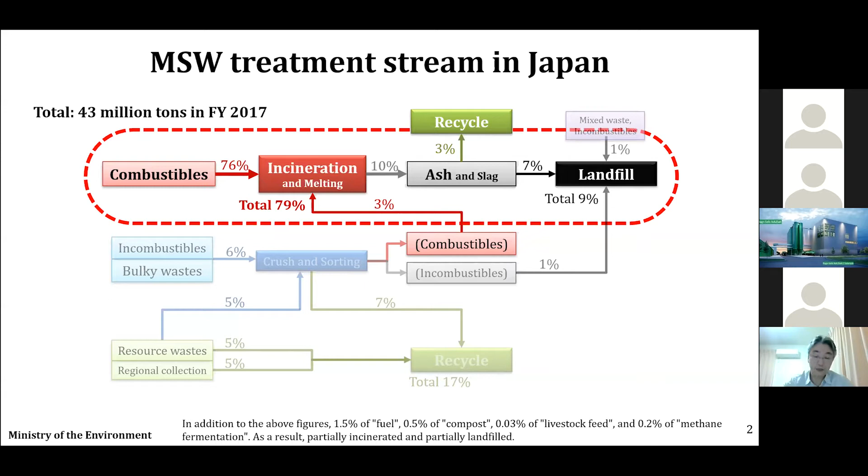However, 7%, including most of the fly ash, still goes to landfill. I consider one of the reasons would be due to the characteristics of fly ash. So let's consider the factors affecting the characteristics of ashes through the generation process.

As is well known, after incineration of MSW, two types of ash are obtained: fly ash and bottom ash. Today the focus is on fly ash. Fly ash is generated because during incineration, small particles float along with the flue gas, and the flue gas contains acidic gas and low-boiling-point heavy metals.

After gas cooling through the boiler and water injection, some excessive lime and activated carbon are injected to neutralize the acidic gas and to adsorb heavy metals such as mercury. Then the mixture of fly ash and air pollution control residues is filtered at the bag filter.

As a result, the characteristics of fly ash become high pH, high concentration of calcium and chlorine, and also high concentration of heavy metals. The gathered fly ash is mostly taken to landfill, but part of it is recycled. In the next slide, I'd like to introduce an overview of fly ash treatment technologies.

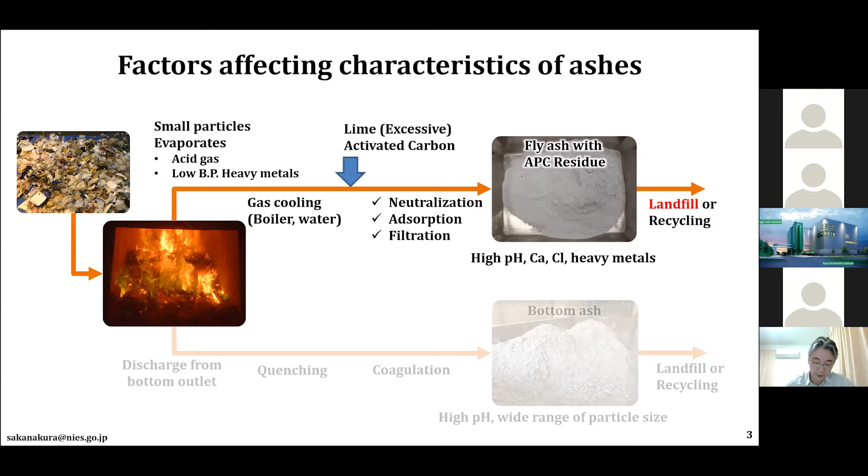The treatment technologies of fly ash can be distinguished into two types: thermal treatment and stabilization-solidification treatment. Thermal treatments are melting, vitrification, sintering, and recycling as raw material of cement. After thermal treatment, most of the residues can be recycled as construction material. Furthermore, byproducts from melting, such as secondary fly ash and metals, can be recycled as raw material for smelting.

However, as I mentioned, currently most fly ash is landfilled after stabilization and solidification treatment. The technologies are chemical stabilization using organic or inorganic chemical agents, and cement solidification. After that, fly ashes go to landfill.

In this slide, I'd like to briefly introduce landfill sites in Japan. The upper left is a very large disposal site built in the sea. Large cities facing the sea, such as Tokyo and Osaka, dispose of waste at such marine landfill sites. Such landfills function in the sea to block water, keeping the water level inside a little lower and preventing dirty water from leaking to the surroundings.

The upper right and lower left are inland landfills, shown before waste is put in. At the bottom, a rain collection pipe can be seen, and double liners are installed to prevent leachate from seeping underground. The lower right is the type with a roof to prevent rain from entering. Under the roof, sprinklers work to stabilize waste, and the leachate is cleaned and reused as sprinkler water again.

Now I'd like to explain the regulations on fly ash to be disposed of in landfill. Fly ash was designated as a specially controlled waste in 1991, and fly ash must be treated to meet the waste landfill criteria. The focusing items are heavy metals and inorganics such as lead, cadmium, hexavalent chromium, mercury, arsenic, and selenium.

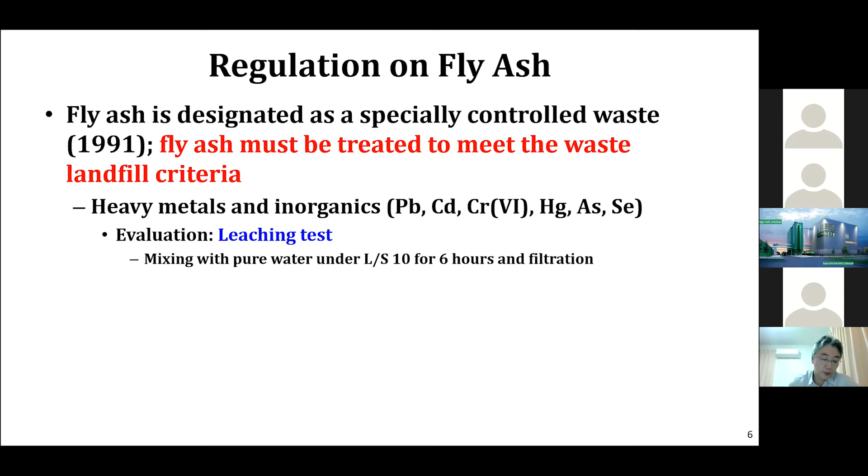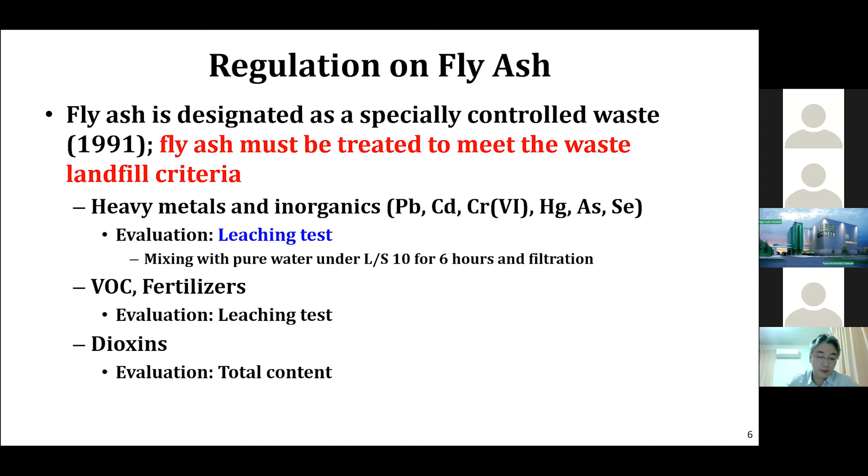They are evaluated by a leaching test, explained in the next slide. Volatile organic compounds, pesticides, and dioxins must also be evaluated. The leaching test applied follows this procedure, called JLT-13.

After sieving the waste sample, more than 50 grams are mixed with 10 times the volume of pure water. The bottle is then shaken for 6 hours horizontally, and the liquid portion is separated from the solid portion. Concentration of heavy metals and other substances in the liquid is determined by ICP, for example, and then it's judged whether the waste is acceptable for landfill.

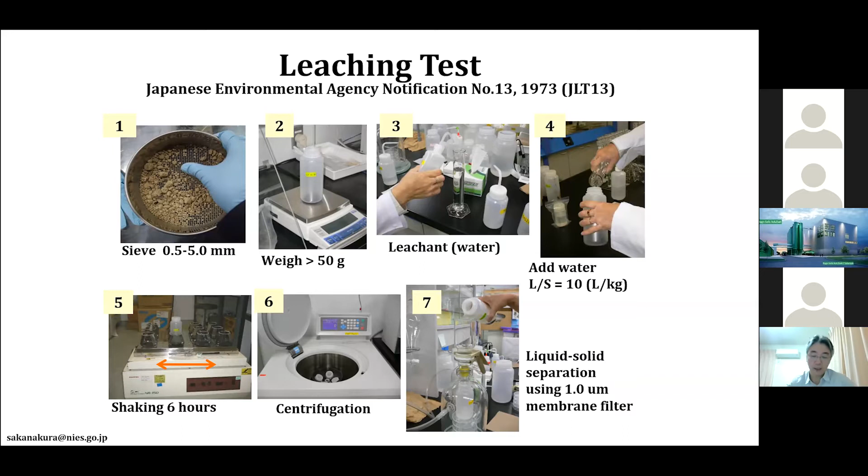However, untreated fly ash cannot satisfy the landfill criteria, especially for lead. So treatment technologies for landfill have focused on reducing the leaching amount of lead and the high pH condition of fly ash.

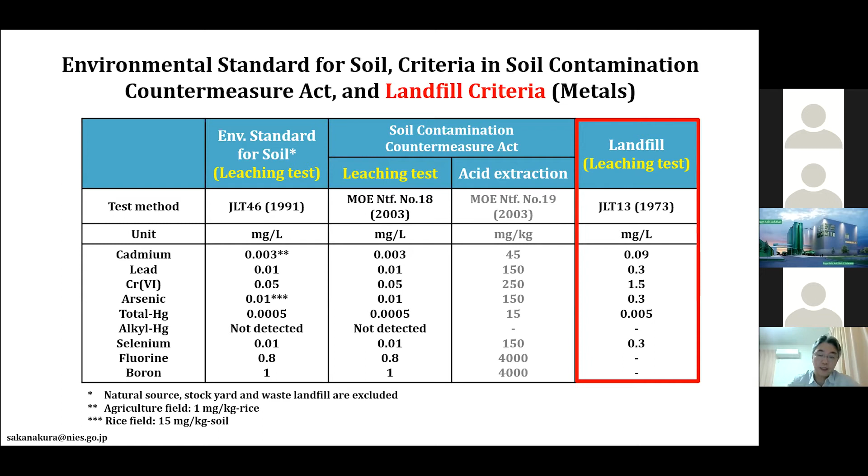Chemical stabilization is the main treatment technology applied to fly ash before landfill. Heavy metals in fly ash will be immobilized by chemical agents such as organic chelator, dithiocarbamate, and piperazine, as shown in the figure. Phosphoric acid, iron hydroxide, and so on are also applied.

In Japan, organic chelators are the mainstream for fly ash treatment for disposal because the landfill criteria can be achieved easily.

However, I should mention there are doubts about the long-term stability of these chemical compounds. Furthermore, long-term COD loads and ecotoxicological effects are also suspected.

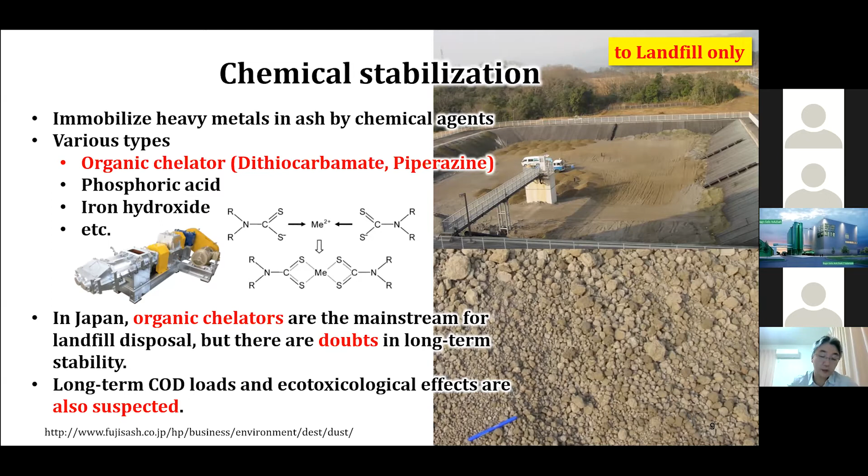The second treatment technology for landfill is cement solidification. As is well known, the process is to mix fly ash with cement and water and age it for days. Note that the treated ash is not necessarily hard enough to have a certain strength.

Cement reaction is not an instant reaction, so the leaching of heavy metals decreases slowly. So it is better to think that heavy metals are stabilized by chemical action with cement.

This figure shows the actual situation of fly ash treatment over Japan, based on statistics by the Ministry of the Environment. As of 2017, as many as 980 thermal treatment plants, including incineration and gasification, are working in Japan.

The number of facilities doing chemical stabilization, shown in the red line box, or a combination of chemical stabilization and cement solidification, is overwhelming, nearly 80% of the total.

However, several facilities are applying melting treatment. Also, there are 88 facilities without treatment. It is presumed that the treatment is outsourced, including cement raw materials and melting, to private companies.

So I'd like to explain the recycling technologies of melting and cement raw material in the following slides.

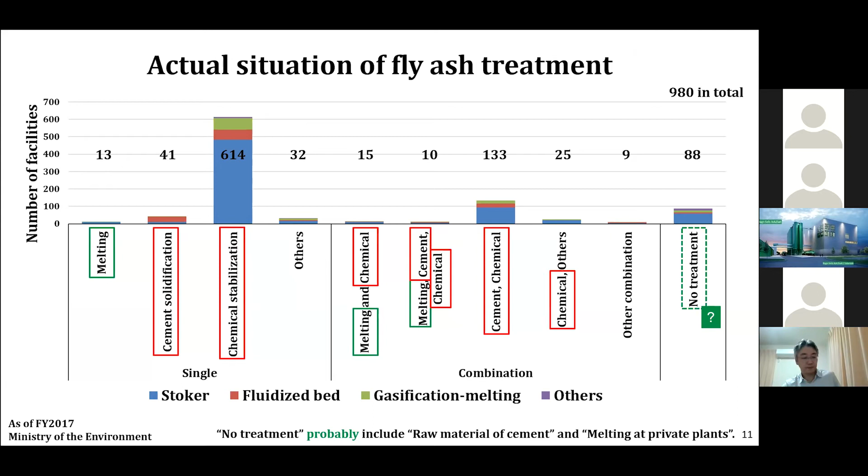In the melting technologies, ash is melted at high temperature and cooled down to obtain MSW slag. The main feed of melting treatment is bottom ash, but fly ash can also be accepted.

Besides, there is direct melting of MSW, which is also called gasification melting. The characteristics of the slag from bottom ash, from fly ash, and from direct melting are basically similar.

The obtained slag is recycled as construction material, such as concrete aggregate and road construction material. As explained in the next slide, standards for concrete aggregate and road construction were published in 2006.

Currently, about 540,000 tons of slag are recycled from about 200 facilities over Japan.

During melting, heavy metals will be separated from molten slag into metal and secondary fly ash. The metals are being recycled as smelting resources. Also, part of the secondary fly ash is recycled as metal resources, but the rest is still landfilled.

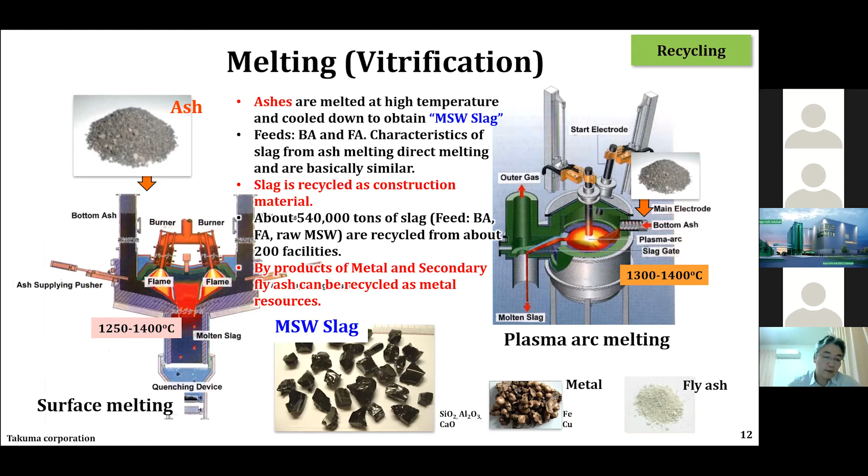This slide just introduces the Japanese industrial standards of MSW slag for concrete and road construction. Although most of the heavy metals are separated from slag into metal and fly ash, there is a criteria for environmental safety, leaching and content, to gain trust from citizens.

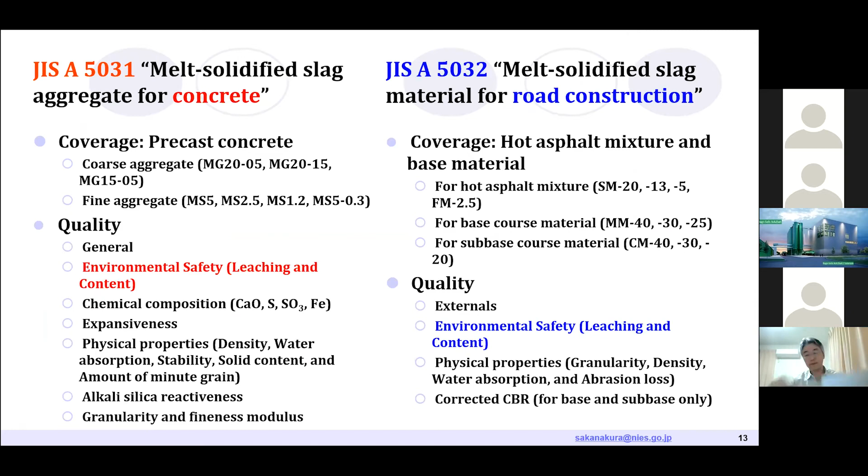The leaching test method is also established, and the method is a little bit different from JLT13, JIS K 0058 mixing blade method. In this test, in case of granular material, it can be applied without size reduction.

In case of monolithic materials, test specimens can be applied as they are. So it is possible to test in a state close to the form used, not the raw material.

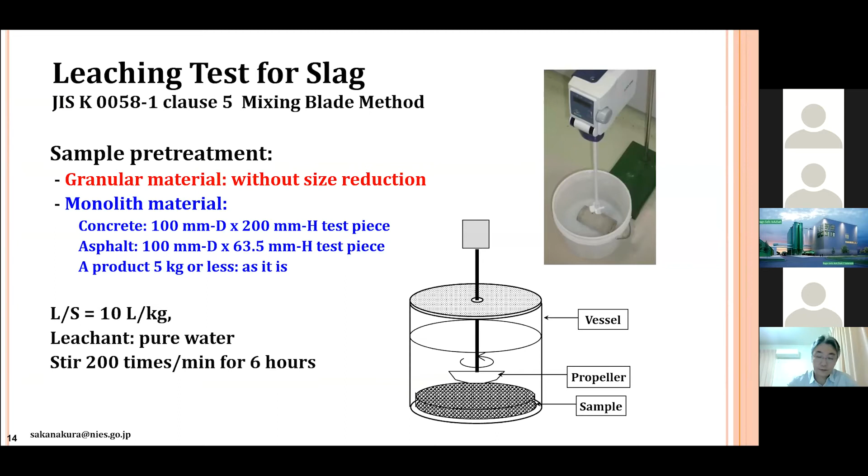In this slide, I will explain the recycling of ashes as raw material for cement. Since the components of the ashes are close to cement, they can be accepted as cement raw material.

However, ashes contain elements that are disliked by cement, such as chlorine and chromium, so only about 1% of the total feed materials can be substituted by ashes.

Furthermore, pre-treatment for bottom ash and fly ash is required. In case of bottom ash, removal of large sizes and metals and crushing is necessary. In case of fly ash, washing out of chlorine is required.

About 380,000 tons per year are recycled, in almost all cement factories over Japan.

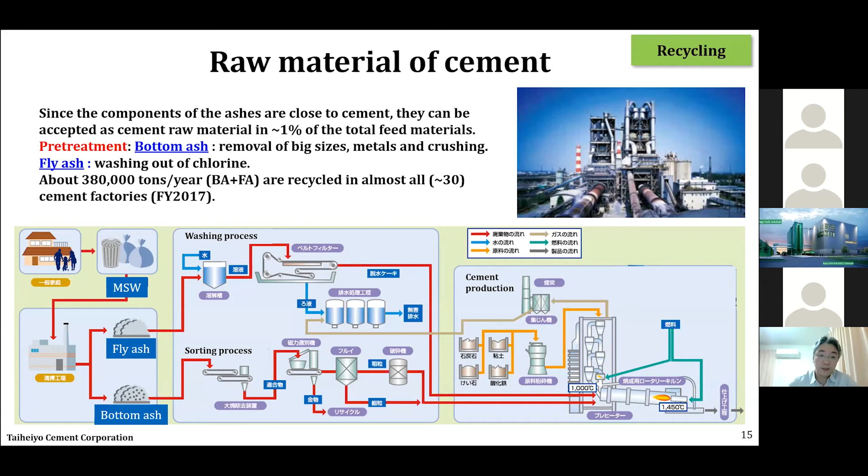I would like to introduce one more recycling technology: raw material for metal smelting, especially for fly ashes generated from melting furnaces.

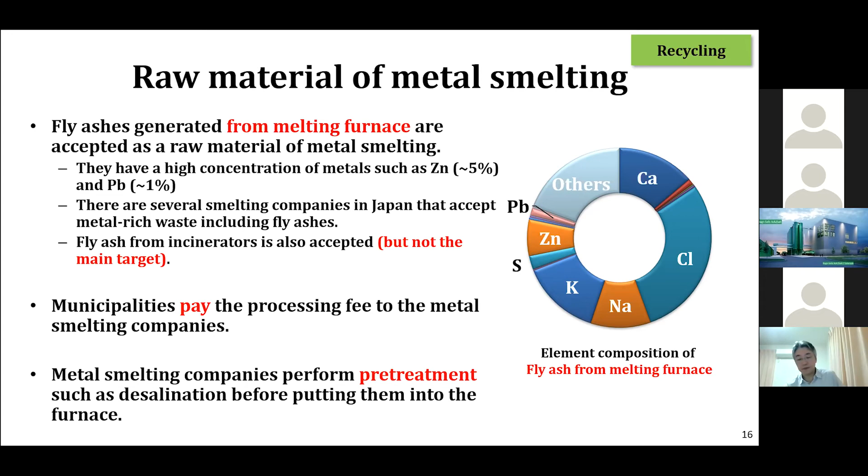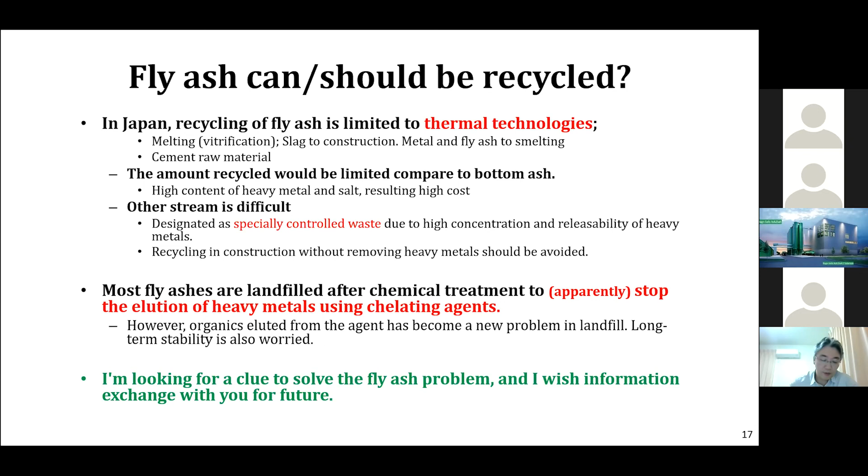So I'm also looking for a clue to solve the fly ash problem, and I wish to exchange information with you for the future. Thank you, that's all my presentation. Thank you very much for listening.